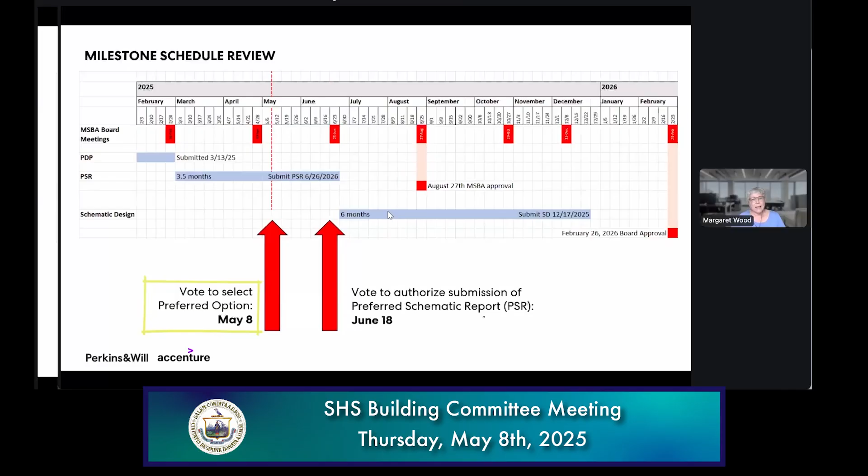So, next slide please. Just a couple of updates. First, I want to give a huge shout out to everybody who participated in the community meetings last week - yes, it was last week. They were great, we had great turnout. The design team is going to report on some of what we heard in the meetings, but thank you to everybody who came or sent your friends, because the turnout was really terrific and the comments were super helpful.

So we are where the red arrow is today, voting on the preferred option. We have a pileup of meetings at the absolute easiest time of year to attend meetings in June, when there's a lot going on at the schools. So I want to acknowledge that to all of you teaching or managing kids in school - this is a lot. We'll have a meeting on the 29th where the design team will give us an update on the preferred option development, which is really going on for another 8 months. But we need to take another step forward on the detailed design of that option.

Then on the 12th of June, we're going to look at the entirety draft submittal of the preferred schematic option. You'll remember it's like the PDP, but now more focused on a particular design, and the due diligence piece is kind of behind us. Then on the 18th, you'll be asked to vote to authorize submission of the PSR. In tandem around that time, the school committee will also vote to give final approval to the ED program and space summary. And then school ends, everything blows up, and we don't need to get back together until July 17th.

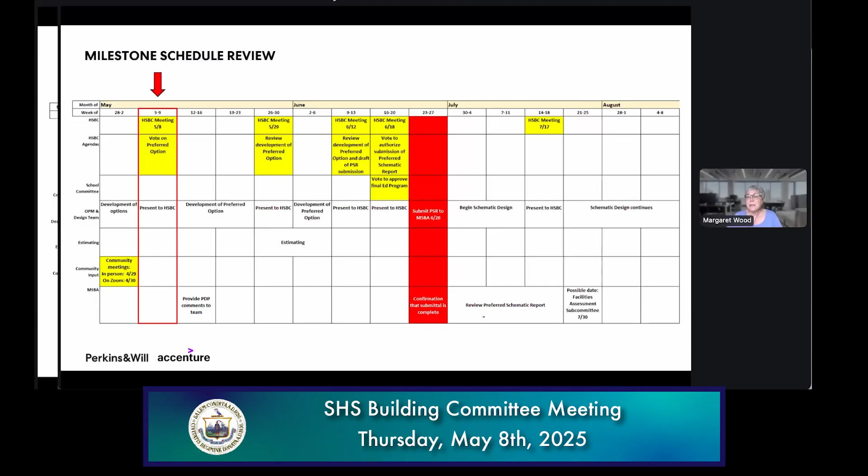And then off in the distance in late July, it looks like we have a likely date for an important meeting with them - what they call their Facilities Assessment Subcommittee, where the peer group of the MSBA weighs in and makes their own peer comments on the preferred option. So that kind of encapsulates what's going on here. All right, next slide.

Okay, so the two big items we're going to tackle today. First, we're going to look at each of the options in some detail, have some discussion and take a vote on the preferred option. Then we're going to revisit the issue we spent time on at the last meeting, which was the options for construction procurement or construction delivery. We do not need to spend as much time on that, but we are also asking you to take a vote on it. And then there's some miscellaneous other things we want to talk about, but those are the two big items.

So I am going to turn it over to the design team to lead us through a detailed view of the options. These are mostly the same images you saw if you had a chance to look at the draft sent out last night. The sequence of a couple things have changed, but otherwise the content is the same. So Brooke, do you want to take it away?

Yes, thank you, Brooke, hey Margaret. Brooke, before you go, just for folks listening on Zoom, we're gonna go through all of the options and then have the discussion. We're not gonna stop and discuss and then go to the next one and discuss. We're just gonna go through all of them.

Yes, and we'll go through the presentation. Hopefully people had a chance to review everything in advance. As Margaret said, some of the order has changed for clarity purposes, and it'll be obvious to you. So let's stay focused on the presentation itself that you're seeing in front of you.

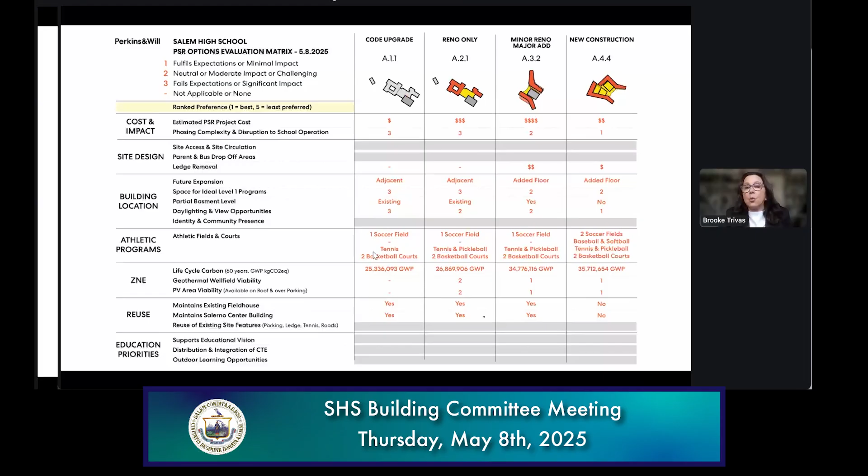We are going to think about the attributes that will fulfill your expectation or doesn't fulfill your expectation. So that's sort of the premise of the matrix.

As Margaret said, we had two really, really effective meetings last week. We had an in-person meeting with the community and it was well attended. We had a great discussion. It was a 2-hour meeting, which did, I admit, last 2.5 hours. And that was because there was just so much dialogue, so many questions, and it was great. Everybody was willing to stay.

You have seen this in advance of the meeting, so we're not going to go through every question, but there were a lot of great questions. How long will they take? What's the cost of doing nothing, which is the code option, and we have pricing for that. A little bit about construction duration, about noise and traffic, how many seats in the auditorium. They were very specific in their comments.

There were also issues of some challenges or concerns, talking about transparency, making sure we think about Horace Mann, which we are thinking about in the traffic solutions. People were very positive about the options, and we will say that there was pretty much a unanimous interest in new construction.

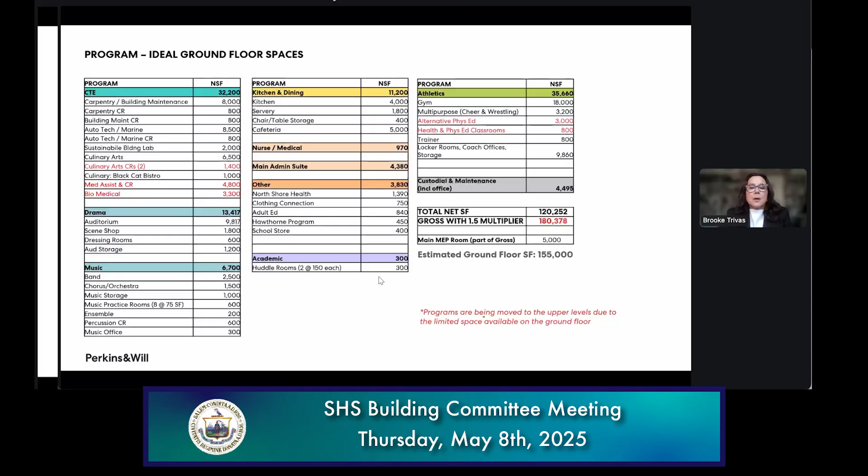So then we gave everyone the exercise of looking at these diagrams and saying, what do you think of these adjacencies? What do you think works? What do you think doesn't work?

On the first floor, we know that some programs absolutely need to be there, like carpentry and building maintenance, automotive, and technology. The gymnasium is excellent to be on the first floor with the locker rooms, auditorium, and music.

Music wants to be with the auditorium. Culinary arts needs to be near the Black Cat Bistro, cafeteria, and kitchen. There was great discussion around this.

Everything teal represents the CTE programs that are throughout the building. So we're trying to create a very integrated program in this comprehensive high school.

We have circled some of the programs that would like to be next to each other, like these two culinary classrooms down on the first floor. We're having trouble fitting those classrooms there, and maybe the alt-E PE and health classroom too. So this is still very much a work in progress.

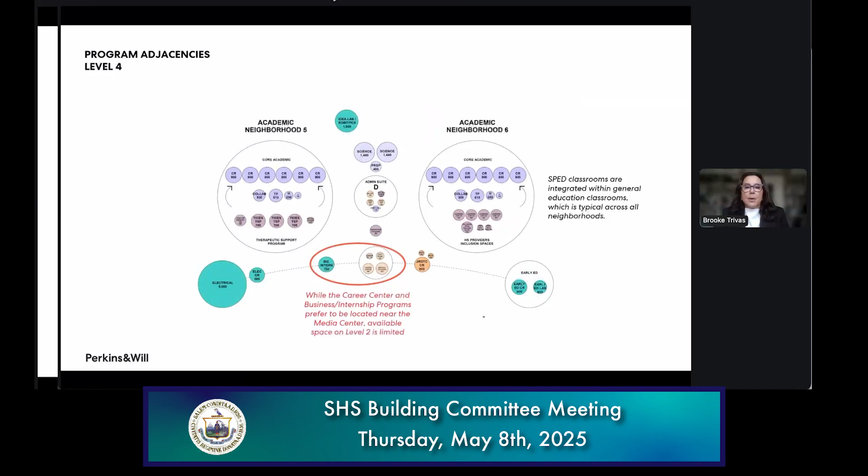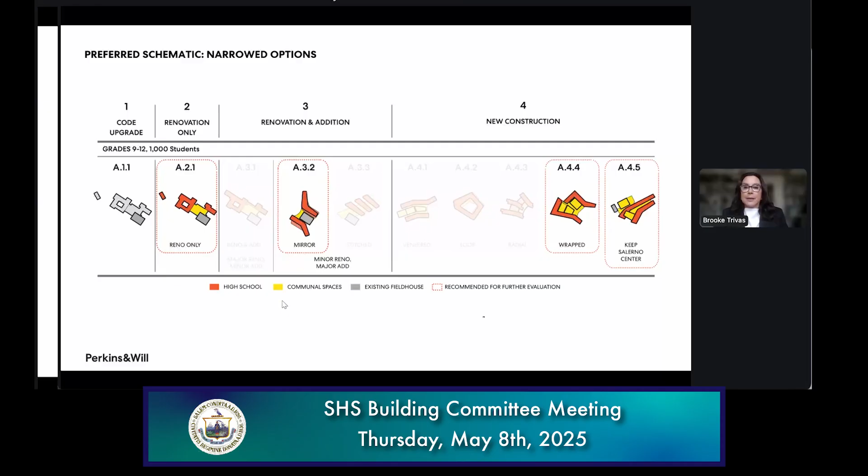So with that, we're going to go through the options. We're going to lean in a little more on renovation only because we don't think we spent enough time with that. But other than that, nothing should look radically different. We have some more developments in the site plans, and we're going to show that to you, but nothing should be really unfamiliar to you at this point.

So Patrick is going to take you through some of these, where we are with these options. Great, thanks, Brooke. So we'll start off with the code upgrade only and refresh your memory of this scheme. The scheme obviously will bring the building up to all the major building codes, including ADA.

It will have new HVAC and plumbing, most of which are because those systems are at the end of their useful life. But that also means electrical and fire protection systems will be upgraded throughout the building. Right now, for example, only parts of the building are sprinklered. The building will also need to meet the current new energy code, which is aggressive, meaning there is investment in the building envelope, not just the mechanical systems.

In this scheme, obviously, the site program relationships don't change too much. We kind of retain the district storage that's in the building. And importantly, you retain a building that is oversized, quite frankly, for the program. So you have the challenges that come with that.

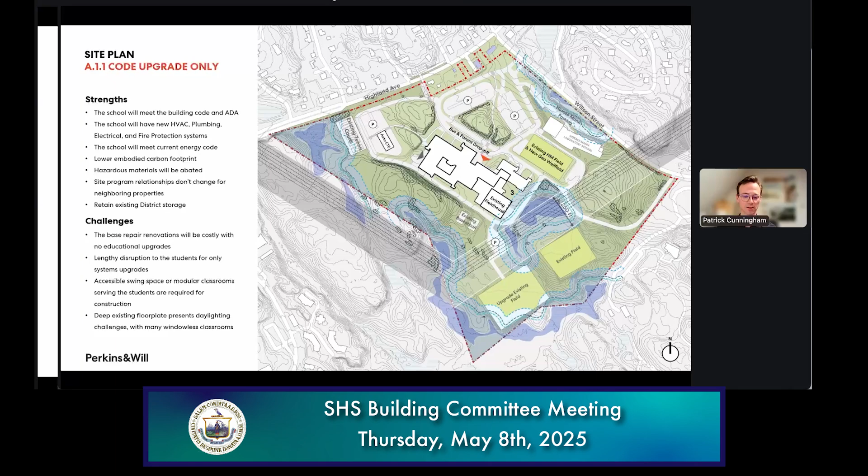So the challenges, obviously, with that are that you have all those costs with very little educational benefit. And it's kind of in a way the cost of doing nothing - it can't really be done because all of these things really are required to maintain accreditations and maintain a building that is usable for the community.

So you can see in the renovation only scheme, and we're talking about a more substantial renovation, not just a code renovation. In that option, we would still be looking at upgrading the mechanical systems and attempting to achieve zero net energy with the building.

It will be more difficult. Mostly you can see, if you were to trace your finger around the perimeter of the building, there's a lot more ins and outs, and every one of those little corners is a potential for energy loss. So the ability to make a really efficient envelope for the building obviously is not there. This would require a fairly disruptive multi-phase project, and we'll get into detail a little bit more on that.

We started to flush out the plans for this scheme and really started to work with what the assets of the existing building are. For example, the space where we typically meet, the library space, is a beautiful open space that looks out into the trees.

We're thinking that could be a really fantastic place for the cafe. It's right sized and in the right position to be the heart of the school, rather than having the cafe on multiple levels in lower spaces off to the side of the building. We'd reconfigure the back of house and kitchen to support that cafe at the center, allowing it to become a better pre-function space for both the auditorium and the existing gymnasium.

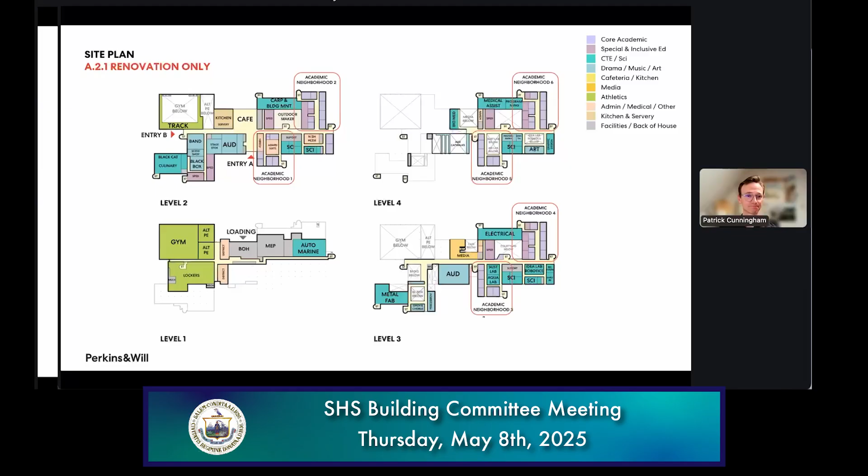This scheme obviously has complex phasing. We've started to tease out strategies, and this would get a lot more input if it moves forward with a contractor on board to help figure out the most cost-effective way to phase the building. But needless to say, it would definitely be multi-phase and complex.

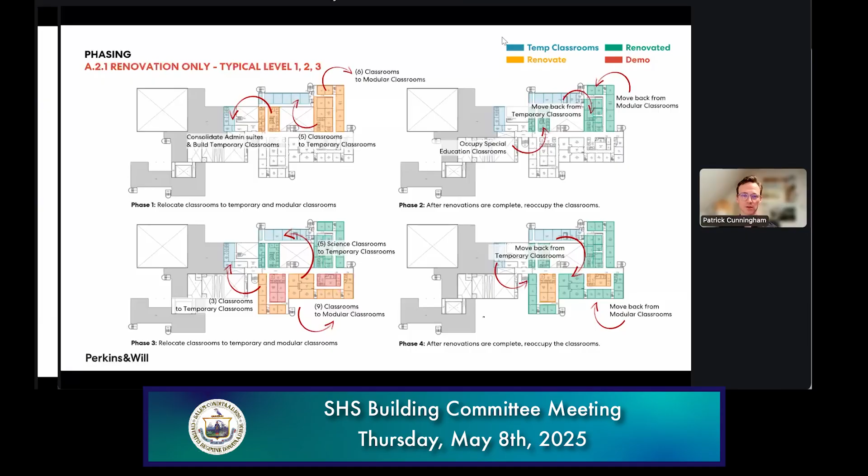The strategy implies we'd take half of that pinwheel at a time, renovating it by moving students into modular classrooms or into the current cafe space temporarily. Through each phase, we'd move students into one half while renovating the other half of the corridor, keeping construction sectioned off vertically on one side.

We're also looking at how we might phase the bulk of the spaces that support the public life of the school—the auditorium spaces, the gyms, locker room spaces—and those could be done in a number of different ways, depending on how much construction you want to bite off at one time on the site.

And I want to interject—Margaret, who was it who said they moved 9 times the last time they did the renovation? I think it was Lori. Lori, was it 9 times? Or, yeah, it was someone like, it was around 4 times that I moved in a year and a half. I moved classrooms. All right, so 4 times.

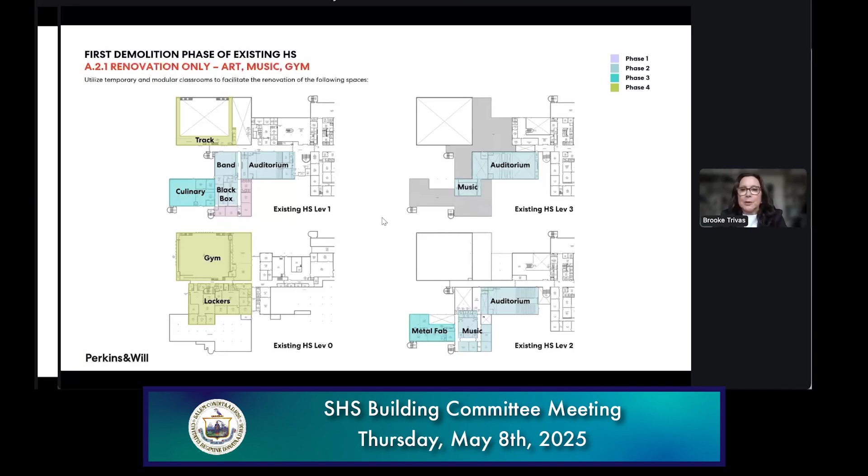So again, we know a CM would do this differently. It would probably have to be depicted in many, many pages of drawings to get right. But there would be, as Lori could tell you, a significant impact to teaching and learning, and what you'll see is cost. So you can chime in later with that. Okay, sorry about that.

Next, we're going to look at the addition/renovation scheme. This scheme retains the existing gymnasium space and builds around that as the heart of the school, also in multiple phases. But this scheme has the benefit of moving the building out of the center of the site, taking that flat section in the center and creating a beautiful open common field space for the community, setting up a beautiful entry to the school.

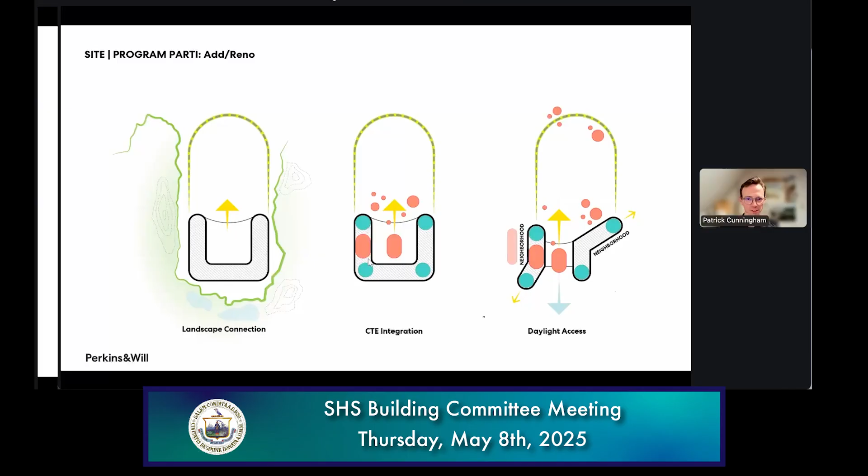So if you can go to the next page, we'll talk a little bit about the pros and cons of that.

So if you remember, in all of these schemes, we're looking at moving the primary entry to the site down street from Highland, so that the Willson Street entry onto campus is further away from the congestion of Highland Avenue. We're also looking at creating an emergency entry or exit only onto Highland Avenue so that you have multiple options to serve the site in the event of an emergency.

This scheme looks at taking over the Horace Mann Field for a GeoExchange well field because it would be closest to the bulk of the building, so it would be most efficient. This scheme has a single new field in the center of the site, and you'd be maintaining or upgrading the fields across the power line easement to the south. It has the option to retain the Salerno Center or not at the western corner of the site, and as you can see here, it's built around the existing field house.

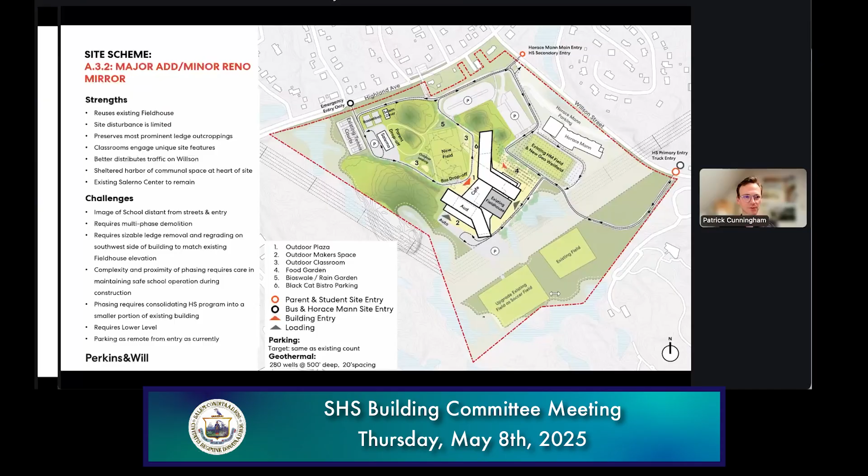This scheme builds the majority of the CTE and public function spaces on that first phase of the project, south of the existing gymnasium, because that's the piece that can get built without interrupting the life of the rest of the existing school. So you see in this scheme that spaces like auto marine, auditorium, early ed are all on that southern wing of the building, and fewer spaces are integrated within the traditional classrooms in the neighborhoods, because those need to be built first as part of the phasing strategy.

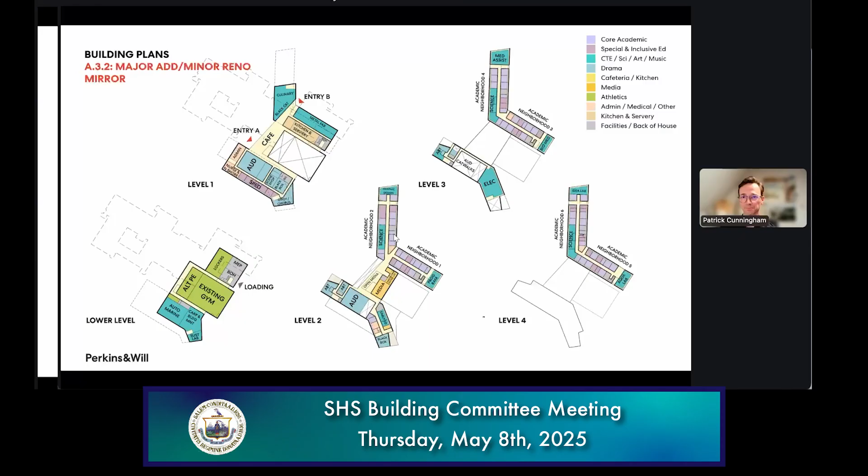So a rough phasing strategy here in chunks: build that first phase south of the existing gymnasium, move those CTE programs into that space and connect it temporarily to the existing building. You can then demolish the CTE programs in the northeastern corner of the building and build the bulk of the rest of the academic spaces.

And then in a fourth phase, we'd be able to come back and stitch the building together and create an entry. And then finally, in that fifth phase, be able to demolish the remainder of the existing building and complete the playing fields at the center of the site.

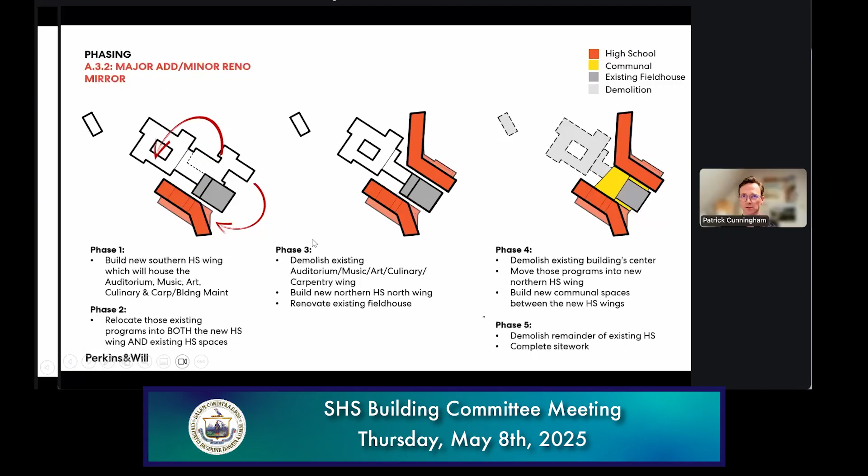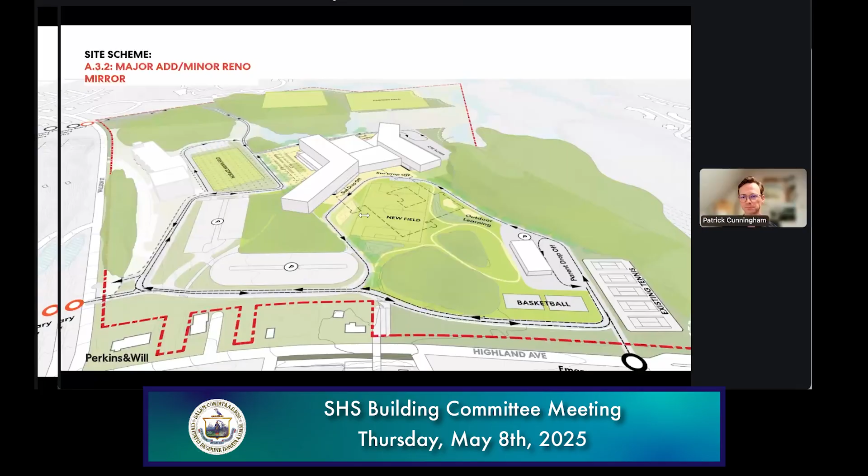It does kind of maintain the rocky knolls as well, so between the building and those ledge outcroppings, they define this beautiful new field at the center of the site. And lastly, the site strategy for the new construction is to place the building on the edge of Highland and to reinforce a gradient from highland to wetland that goes from the most built up part of the site to the most natural edges of the site.

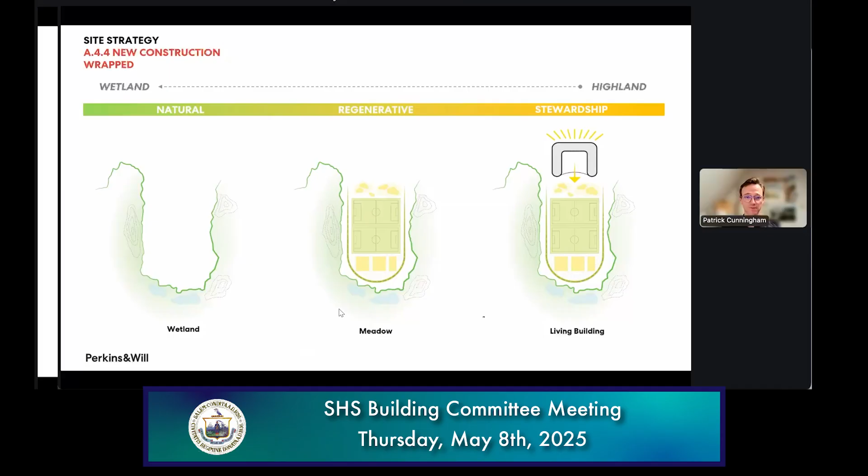And in this scheme, we're starting to study - there's really multiple ways that you can configure the playing fields in the center of the site. And we'll show you a beginning to that thinking.

So in this scheme, you can imagine that their academic spaces are dispersed around the perimeter of the building. They're integrated with the CTE programs because we have the flexibility to place them where we want in new construction, so it's a bit more idealized. There's the opportunity really to bring those academic spaces out into the landscape and think about how the landscape really becomes a teaching tool for many of the programs in the building.

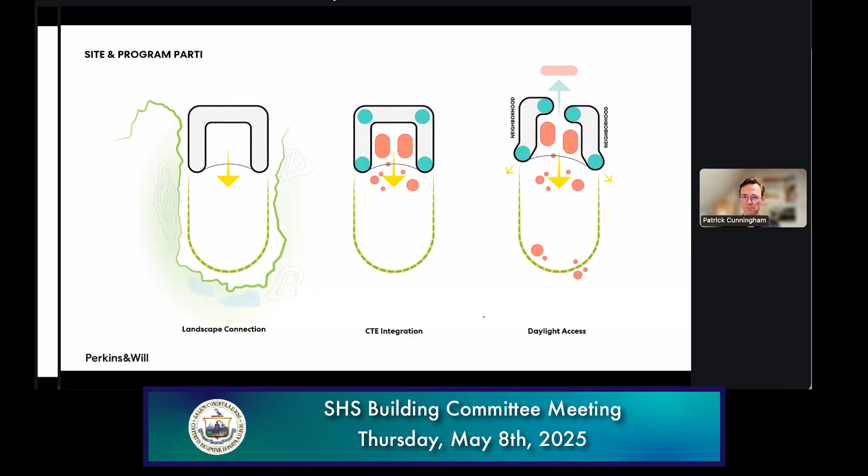So in this scheme, we took another stab at looking at the playing fields at the center of the site. The majority of the rest of the plan is as we presented last time. But what you'll see here is that to balance the needs of athletics with the needs for exterior academic teaching space, and to balance those needs with providing enough landscape to stitch the natural ecology of the site to the more intense programmatic parts of the site.

We've moved the tennis and pickleball south of the utility easement into that lower playing field section. And what that allows for is a bit more flexibility for the academic field spaces at the center of the site, and enough space for some constructed wetland water retention and natural buffers, so that we can make that transition that came out of our conversation about living design more seamless.

Just to say, Patrick, that we did review these options. We had a couple of options, and we reviewed them with the superintendent and the working group subcommittee, so they can chime in after we get through this. This diagram will help describe that a bit more.

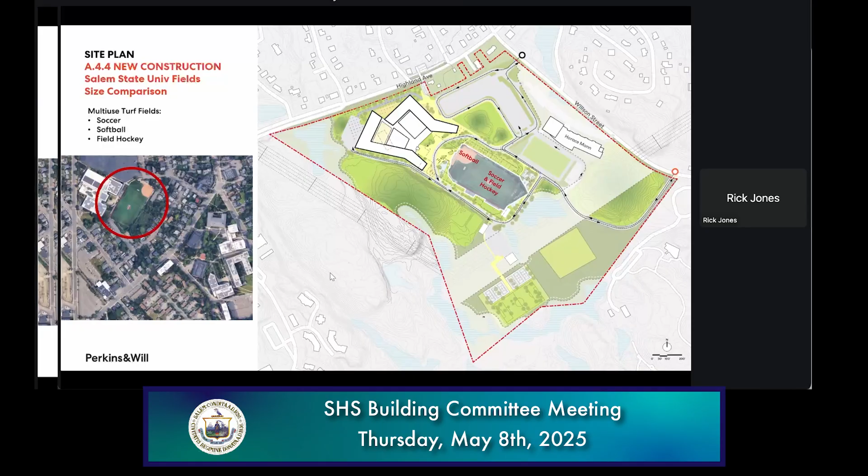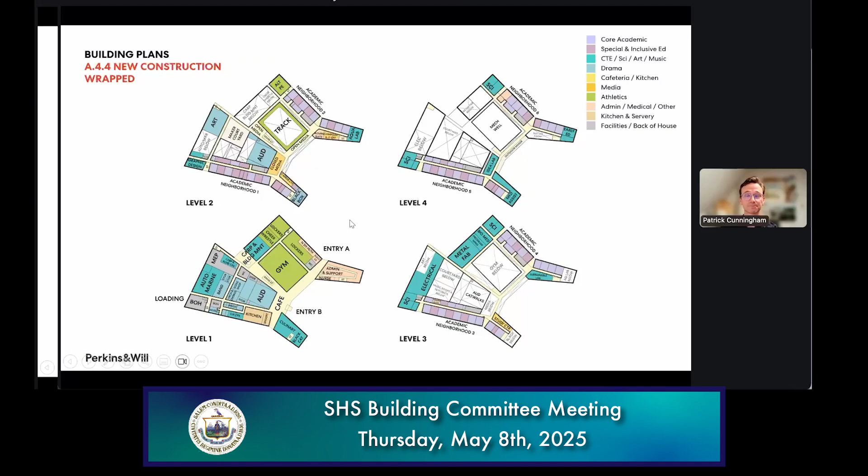Excellent, so go on Patrick. Sure - these plans are generally the same as what we presented at our last meeting with some minor tweaks. But as we move forward with any of the schemes presented, whatever moves forward, there would be more iteration, looking at what the ideal is, especially since we've got great feedback in the last week from your educators. We'll continue those discussions. This will be a give and take of where programs fit, what community access requires, what direct entry requires - for example the infant toddler room. There are a lot of competing forces, and that's design. That's what makes design great - we have our conceptual idea, your program, community entries and egresses, the connection to outdoors, the play areas, so many wonderful things on this site that we'll spend time after the vote developing options to meet those requirements.

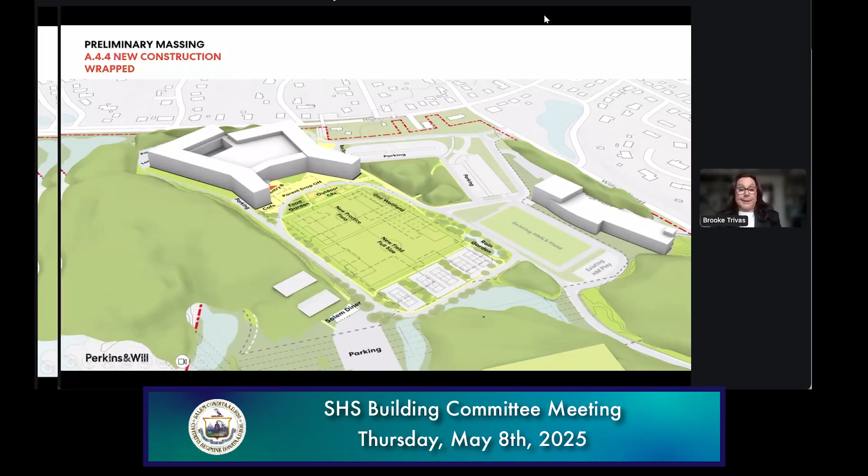Maybe we can pause here to see if anybody has questions from the material sent last night, what's presented. Our carbon numbers too, really quickly - oh yeah, I think that was next. Yes, let's look at the carbon.

Both at our living design workshop and within our community meetings, there were conversations about the overall story of carbon and, more importantly, global warming potential on the site. There's a lot of numbers and it's a bit wonky, and I'm happy to unpack them with those of my fellow nerds who want to get into it at a separate meeting.

What we did was take benchmarking numbers that our office has contributed to at a firm-wide level to understand what we think, at a high level, might be the global warming potential for the construction of the project. When we say global warming potential, that figure measured in kilograms of CO2 equivalent is essentially a blended, rolled-up number of all the things that contribute to global warming potential, expressed in CO2 equivalent so you have a metric you can understand. That number includes the life cycle carbon number.

So we're talking about two big buckets: the embodied carbon, which is the energy it takes to make the things you're sitting on, that enclose your classrooms, that form the structure of your building, and then the operational carbon. The operational carbon is the piece we're talking about zeroing if we go to zero net energy.

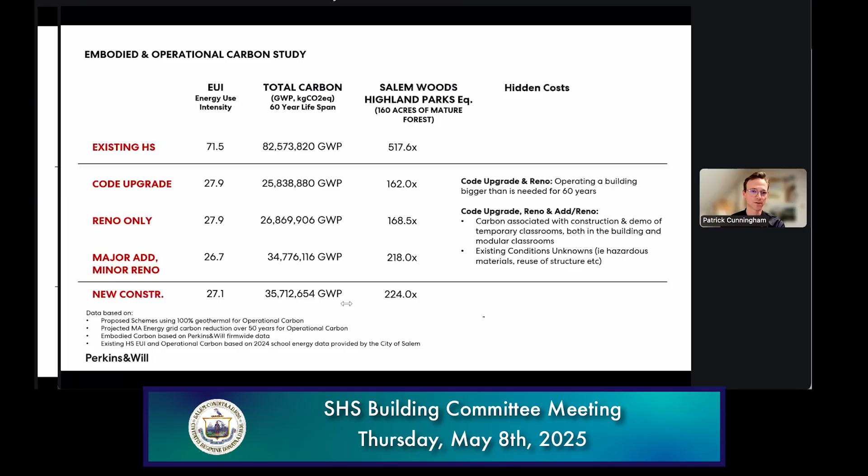So this is really the recap slide that indicates what you will be voting on. You'll be selecting one of these options tonight. Let me just take a peek at the next slide.

I think it's probably important for Margaret to go through the costs. Does anybody have any questions on what has been presented so far? Was there something that jumped out at you that seemed different than what you expected, or did it feel like just an evolution of the ideas we have been presenting?

But before I see you, Jenna, I'm just thinking, do we want to go over costs so we have a better picture first? Of course. Jenna, would you mind holding off on your question? Let's do costs, and then that may inform folks' decisions, and then we'll open it up for questions.

Okay, everybody. I can't point because I don't have control of the website, but I am going to look at the numbers. Between the last time and today, the estimator, Peter Bradley, PM&C, who is working with Perkins and Will, did another round of estimating. Each estimate backing up these numbers is about 14 pages long.

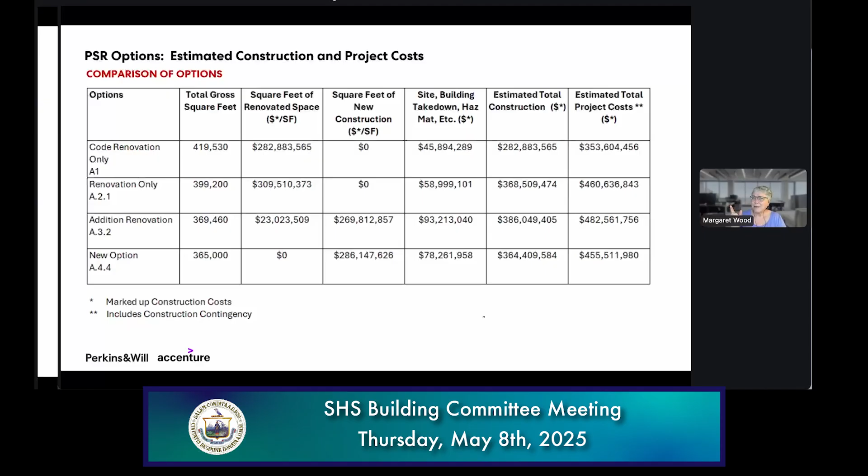Z, I thought I saw your hand up for a minute. Did you have a question, or are you holding it? I did, just a quick question.

In these totals, especially for the new construction, are maintenance costs in this pricing, like 1, 3, or 5 year maintenance costs? Yes, maintenance costs that are associated with the equipment are part of the specifications, which produce the final cost.

There will be more conversations about that. I was just talking about that with friends over lunch, how increasingly important it is to make sure that you have service support for the first couple of years that you're operating equipment. Great question.

Let's look at the next slide, which looks at this a different way. Just to make it more confusing, now instead of going horizontally, it's going vertically. I just couldn't figure out another way to do this, but now each of the options are the 4 columns that are in color. What I did was I rolled up certain buckets of the way construction cost is organized.

The highlighted lines are the places where you see a lot of variation between options. So on the first couple of lines, there's everything from no new construction to 100% new construction. The renovation option, it's the reverse. Demolition is from partial to complete, and the need for temporary classrooms varies from a lot to nothing. Right, so those are based on the options.

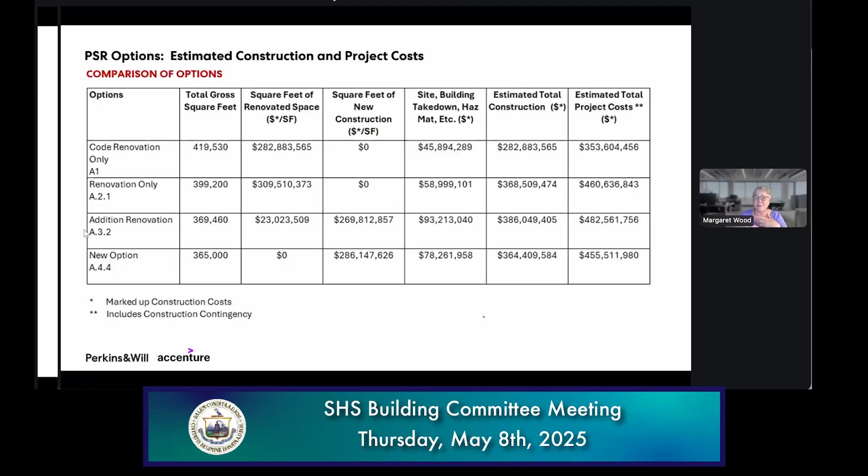I'll add that I think the reality is that the whole political situation, as well as where we are for a variety of reasons, is having a chilling effect on the construction market. So there are two different things happening: there's a lot of uncertainty, prices going up and down. The labor market is definitely going down, which generally is good for school projects because they become more competitive as more people are looking. The other thing, which is hard to factor in but is very much in our minds, is that tariffs are likely to have a lot of impact on when you can get things. You'll have a lot less control—well, we were going to get this, but now we can't because of tariffs, we have to get that instead. So it's a very complicated situation to assess, and there are factors pointing in both directions in terms of cost. All the more reason to flag that it's an issue and say we don't know enough right now, but it should be carried for this purpose in construction contingency.

Thank you, appreciate the clarification. Beth Ann?

Thanks, I just have a question about the new construction. Visually, I'm trying to wrap my head around where the athletic fields are. Are the newer athletic fields roughly where the current building is? Yes, your current building.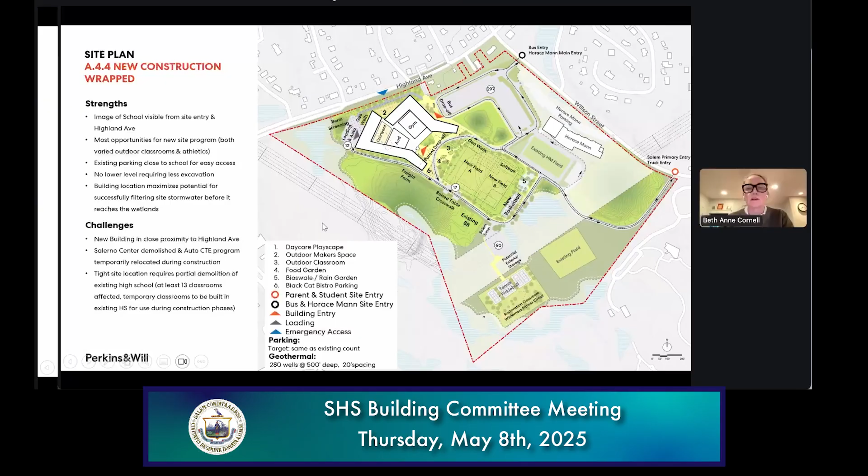I'm thinking about communicating to folks—I'm voting for this option, so that's what I'm hoping we end up at.

But the indoor athletic spaces—I know you've gone over this, but I just want to clarify that the new field house would include 2 basketball courts, an elevated track, new locker rooms, and a new weight room. Everything's new, but is that right? Well, the new field house is the same size as the existing one, at about 18,000 square feet.

We will have 3 cross courts, meaning one competition court but 3 cross courts for practice or PE, and we'll design that. We do have an elevated walking track—for those who went to Stoneham or Billerica, it's the walking track above. It also has an alternate PE space, called a strength and conditioning room, and a separate wrestling and cheer room. We actually had a great talk today from one of our sports practice leaders about girls sports and how wrestling is becoming part of that, so there are a lot of changes we'll talk about as we go. Then there's the health classroom associated with the athletic program, lockers, some team rooms and training rooms. So those are the spaces that would be within the athletic program.

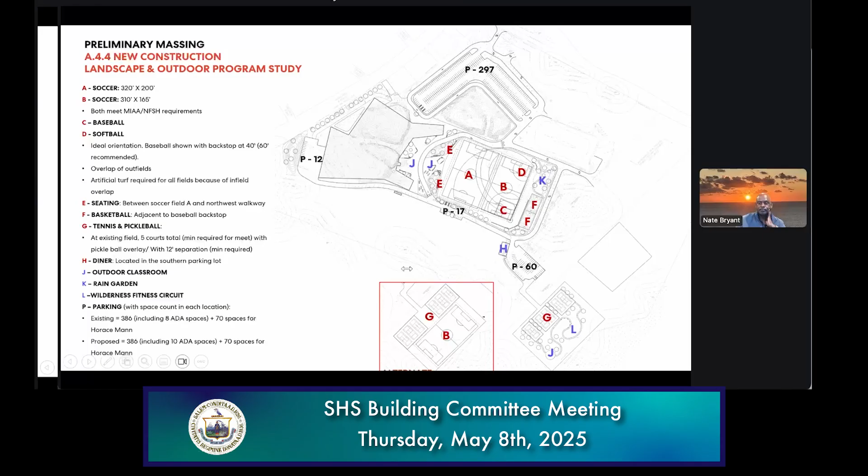Great, thank you. I know Rick had his hand up for a minute and then put it back down—did you have anything to add, Rick? People keep answering my questions, so not really, no. Okay, thank you. Other questions, comments? Before I move this—the mayor? I don't have any questions. I was going to make a motion if there are no further questions.

I would say motion away.

Thanks. First, I want to express my gratitude to all the members of the building committee and the co-chairs, to the project team, and to everybody who's come to the meetings, the community forums about grade configuration, the forums to inform this process around the selection. It's really been a robust process, and one I'm incredibly proud to have been part of. We've been singularly focused on creating an option for our community and our kids that serves them well. Our district is thriving right now academically, and I think they deserve a building that supports them and is as excellent as they are. So being mindful of our continuing obligation to the taxpayers, we've strived to make a grade configuration decision as a school committee that was reflective of cost considerations, among other things.

We're making decisions around the energy use in this building with both a climate mindset and a cost sensitivity. We're going to continue exploring additional ways to make this an affordable project for our community, even though it is going to be a transformative and substantial project by all measures. I'm excited to make this motion and move to advance option A4.4, the new construction option for the preferred schematic option of the New Salem High School.

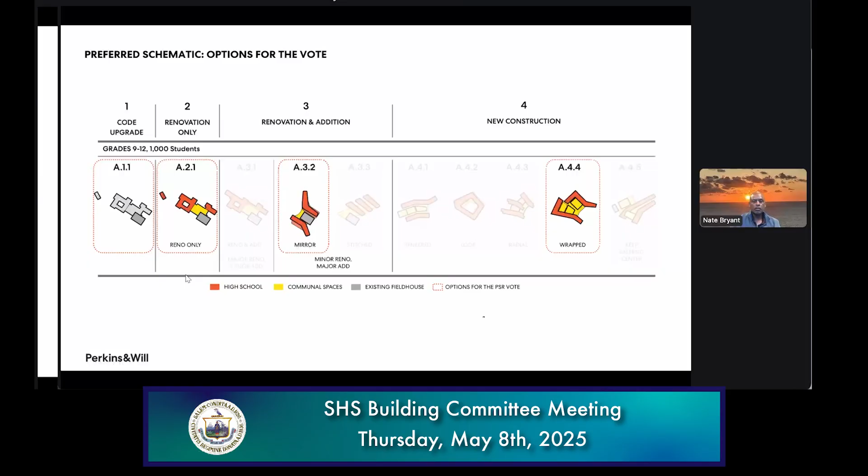Yes, you're in favor of, was it 4.4? And then no, that you are not. So Deb, do you want me to call the roll, or do you want to? I got it, I just had to pull it up. Okay, I'm ready.

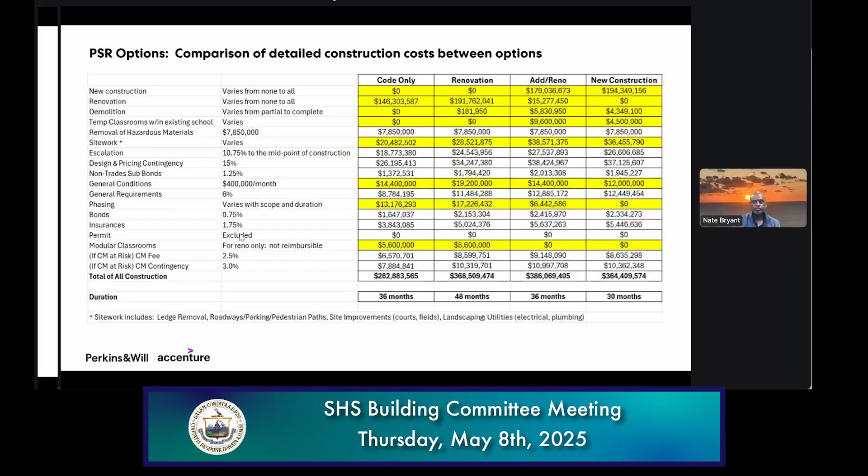Everybody ready? Nate, yes. Glenn — he was on, so maybe not anymore. Beth Anne, yes. Anthony, yes. Matt? He's still on? Matt's still eating that delicious looking cheeseburger. Okay, I'm gonna come back to Matt and get his vote. Jenna, yes. Rick? Yes, sorry, yes. No problem, thank you, worth waiting for. Lori, yes. Mayor, yes. Perla, I am all in, big yes. Betsy, full on yes. Megan, yes. Keith, yes. And I believe that's all the voting members.

See if we can get Matt's vote. Is Matt there? Yeah, sorry, struggling with the Zoom. Can you hear me? Yes, we can. We're voting. Okay, yes. I heard it all, okay. All good, okay. Thank you, Matt. And I just want to make sure, scrolling through to make sure I got everybody — yeah, I do not see Glenn on. Okay, so that is it. So there's 12 people here and 12 yeses.

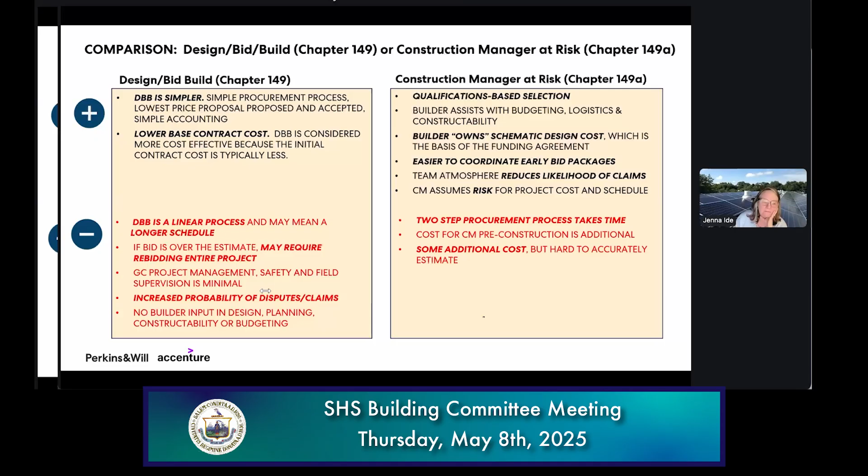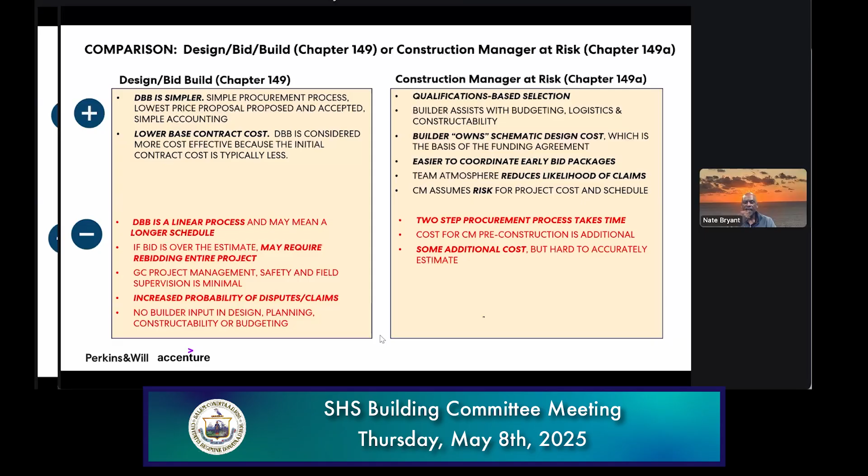Thank you. Any other questions? Hearing or seeing none, I think it would be fitting if Anthony, as the finance working group, would make the motion.

Certainly. Motion to deliver the proposed project via construction manager at risk based on the information presented to the building committee. Need a second? I'll second. Second. Yeah. Questions, comments?

This is the vote. A yes vote is for construction manager at risk, or chapter 149A.

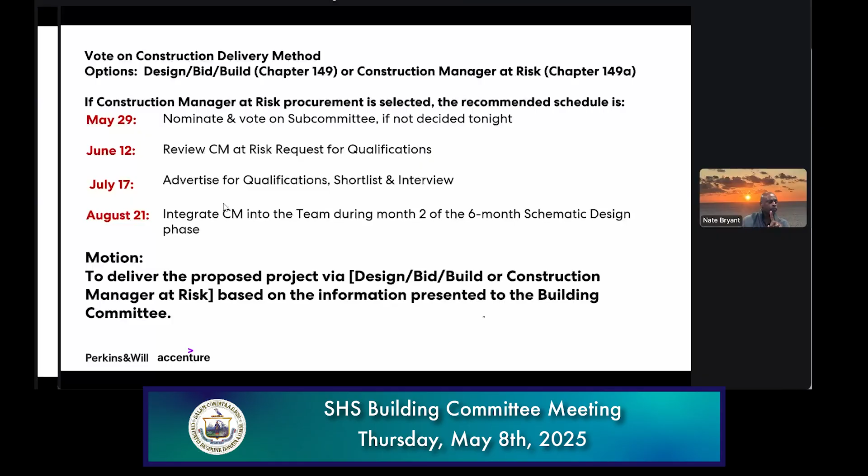One thing I skipped over on the agenda was an update on school tours, which Superintendent Zrike was going to speak to. So we're going to go with an update from the finance working group first, then the update from the superintendent on school tours, then other issues not anticipated. The finance working group met yesterday, and the only point of discussion was CM at risk versus design bid build.

So we did not approve any invoices. And that is it. Perfect. Thank you. Any questions for Anthony?

All right, so again going out of order, we're going to have the superintendent give an update on the school tours.

We, over April break, had a series of tours that were very productive. There were a number of building committee members and school committee members who attended. We went to Somerville, Billerica, and Belmont.

It was incredibly helpful to speak to both users of the building and some of the designers. I strongly encourage other members of the committee to participate in as many tours as they can. I'm very interested in going to see Waltham High School because it's a new high school that has CTE programs. I know it's not a Perkins and Will building, and I know we all love Perkins and Will buildings, but for the purposes of CTE, I think it's important to see those buildings.